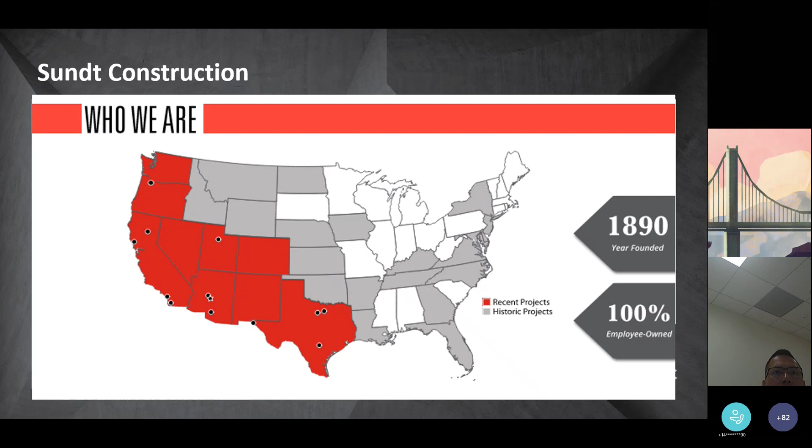All right, so our agenda for today, we've got quite a few topics to cover. Rather than reading off the list, essentially we're going to start with a project overview of the whole program, the various projects the program's doing, highlight some of the details, and then get into the project schedule, the bid schedule, and some of the particulars related to the bidding process, with the various instructions to bidders, pre-qual forms, and various exhibits and attachments. And then we'll open it up at the end for some questions.

All right, so safety is a very important component to Sundt. It's very important that all of our personnel go home at the end of the day the same way they showed up to the office or the job site. So with that, we like to start every meeting with a safety share. For today's pre-bid meeting, Jared's put together a quick safety share that he'll go through.

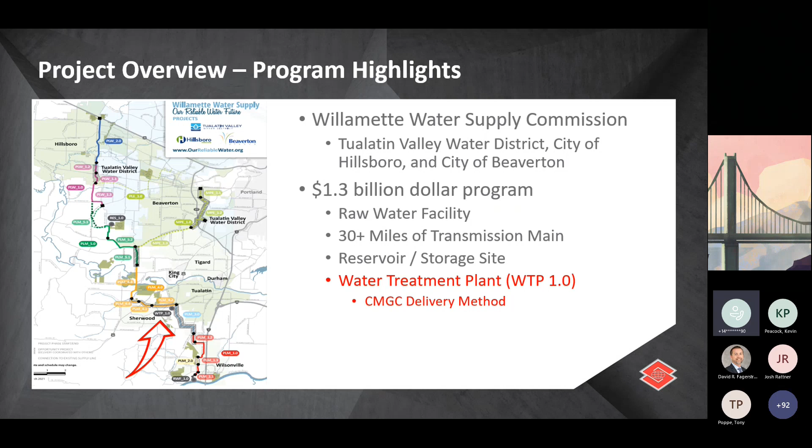The site was strategically chosen. The project is being designed to meet specific seismic requirements to provide a reliable water source to the customers of the treatment plant and this whole system.

A couple things to note specifically about the project site: it is a greenfield site, currently heavily forested with lots of large trees. The subsurface conditions, though, include a lot of rock, which means virtually all of the excavations, whether for structural excavations, pipelines, or duct banks, most of that excavation is going to need to be done through blasting.

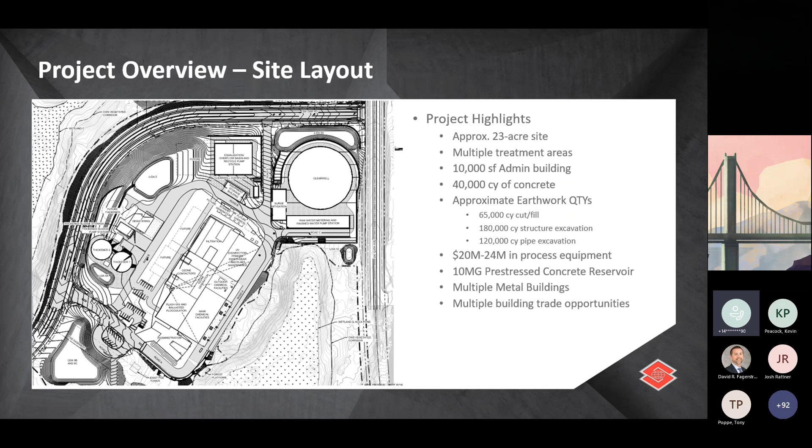All right, so as I mentioned, the last slide is going to walk through real quickly just a general overview of the various treatment processes or facilities on site.

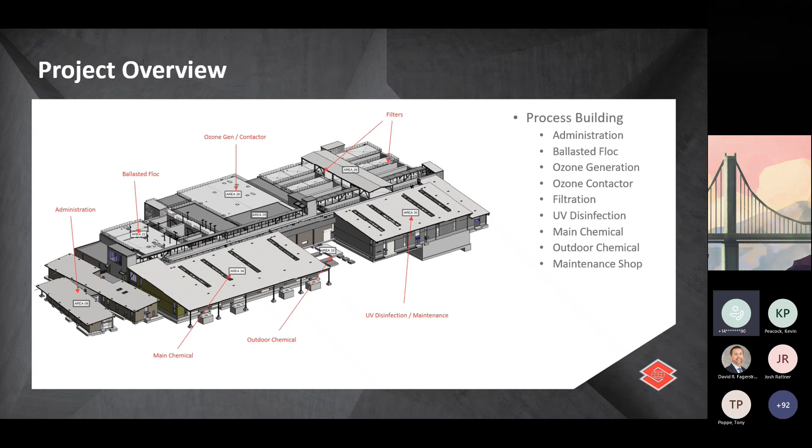Then the last area that we have is the solids handling facility. These structures are going to be west, or to the left, of where the process building was. And this is where all these solids are handled, dewatered, treated, and hauled off site.

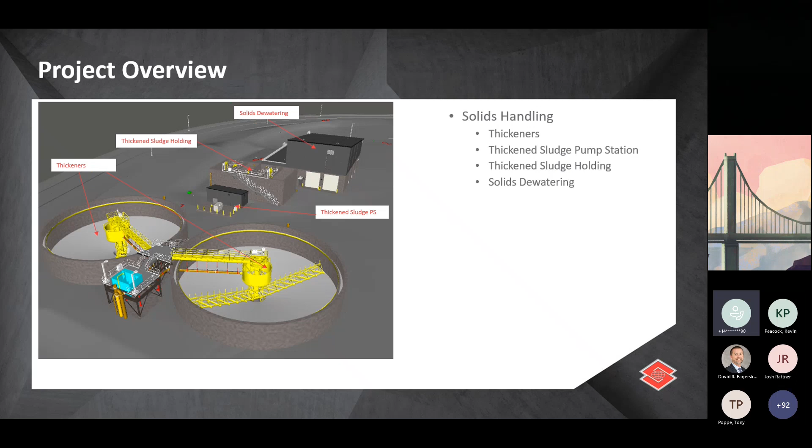You've got your thickeners, which are basically like some clarifiers. You've got the thickened sludge pump station, which delivers the sludge to the thickened sludge holding structure, and then finally to the solids dewatering building, where there's a couple of screw presses, some polymer equipment, where it's dewatered, conveyed into trucks, and then hauled off site. So that's kind of an overview of the entire treatment process.

Again, you've got lots of trade opportunities for the various building components, the industrial type stuff, your process mechanical, and all your electrical, associated HVAC, fire protection - those things associated with those structures.

Now we wanted to talk about a couple of the key components with the project that we're going to ask you to pay special attention to when you're going through the documents. The first item is the seismic design requirements. I briefly mentioned this on one of the first slides, that seismic resiliency is a key component to this project. The facility and the owner want this facility back in operation within a set period after a potential seismic event.

So we've built into the design and the specifications set requirements for confirming seismic qualification. This is going to apply to a good amount of the components on the project: your process equipment, your process piping, a lot of your electrical equipment, your HVAC equipment. It covers pretty much the whole gamut. I'm just going to ask that you spend some time reviewing the specifications and the requirements for it.

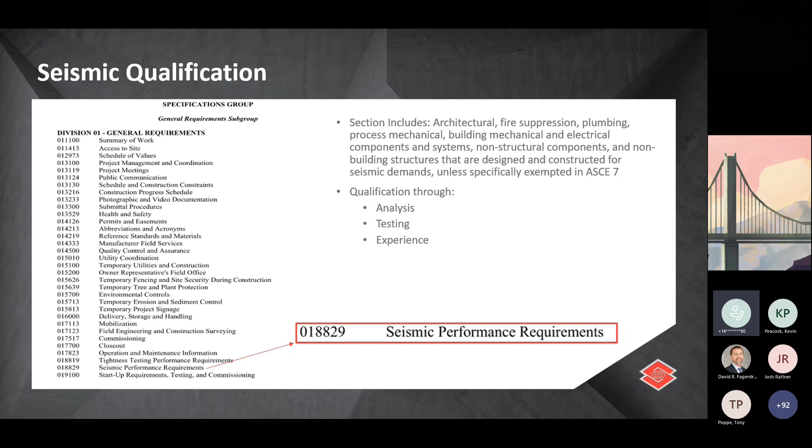The next topic we wanted to highlight that's a key component to this project is the delegated design requirements. Most of you should be familiar with this. Delegated design submittals are essentially submittals or final design documents that are prepared by the subcontractor. Your typical ones are things like fire alarm, fire sprinkler, pre-engineered metal buildings.

We just wanted to highlight that because it's a key component to this project. It's important to note that your delegated design needs to be stamped and sealed by a professional engineer licensed in the state of Oregon.

Again, there are several requirements for delegated design. We've called out specification 01-1100, Summary of Work, for a full list of delegated design items. Just ask that you pay special attention to that as well and go through those requirements. Again, we have called this out in your scope of work, so it's important that you review those requirements.

All right, next we'll go into the project schedule. This is a very high-level schedule—in the bid documents we've provided a fully detailed P6 schedule for you all, but we want to provide a very high-level 10,000-foot view of the project and basically how each trade, the windows of time that each trade is expected to be on site. That's what's being shown here on the screen.

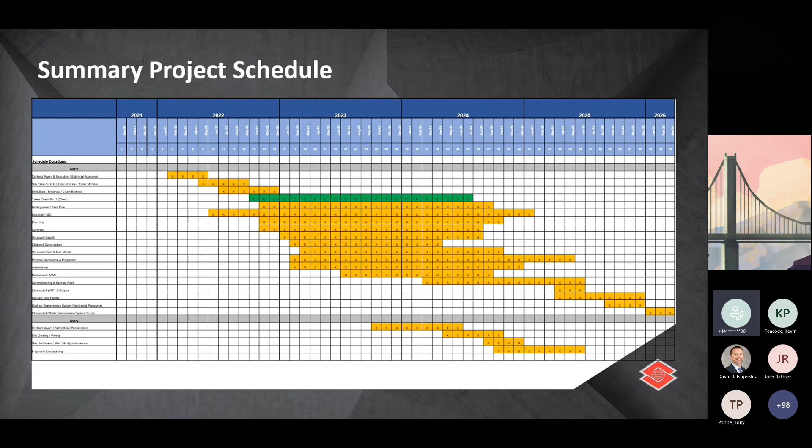Next we'll go over a couple of milestones. As I mentioned, we're expecting limited notice to proceed beginning of February 2022. We're expecting to receive full notice to proceed early April. There's a GMP2, which is a later scope of work for more of landscaping, curb and gutter, that type of finishes work. That work we're expecting to get NTP for in October of 2023.

We have a water treatment plant startup and commissioning milestone in June of 2025, and a construction substantial completion milestone at the end of 2025, December 31st, 2025. Then we have to have all of our closeout documents completed no later than March of 2026. One thing we want to point out: warranties will commence upon successful water treatment startup and commissioning completion, expected to be June 25th, 2025. So if you have warranties associated with your scope of work, which most do, we're expecting that the clock will start ticking on warranty starting June 25th, 2025.

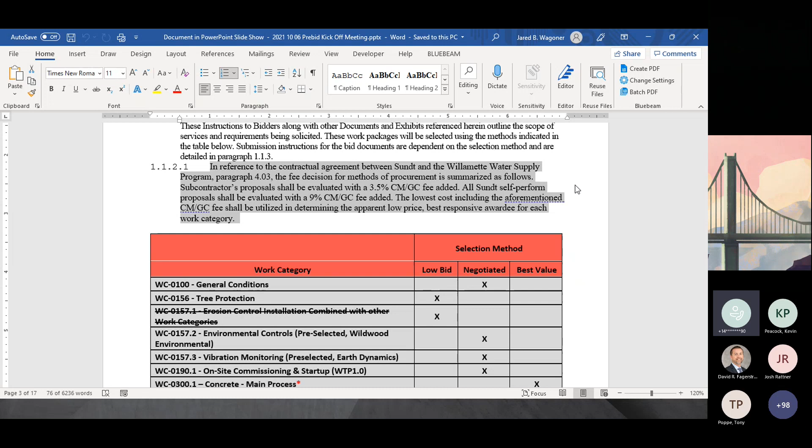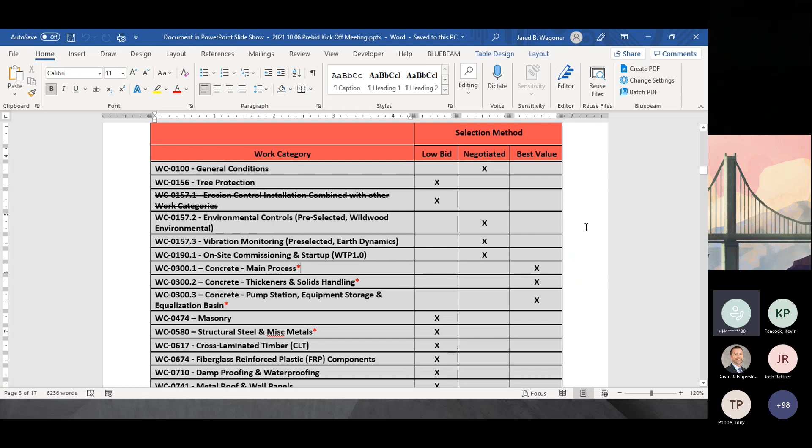Here's that table again of the work categories and the selection methods. The items that have a red asterisk next to them are the ones that Sundt is intending on submitting a proposal for. So we do intend to submit a proposal for structural concrete, structural steel and miscellaneous metals, earthwork and yard piping, and process piping and process integration.

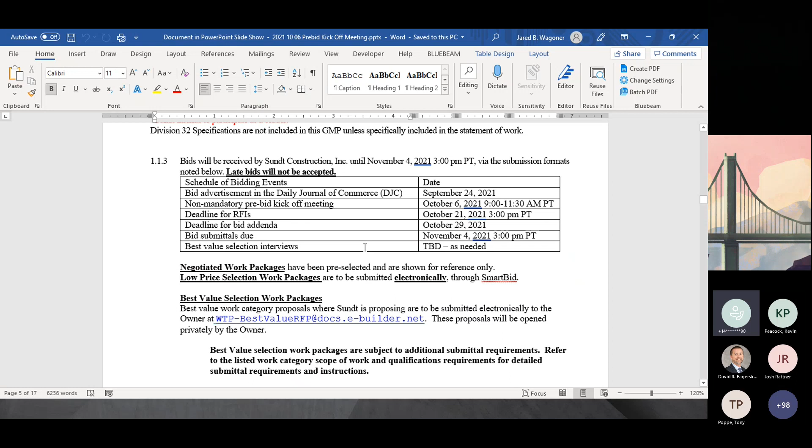Here's that schedule again for your reference on when the bidding period is. Bid submittals are due November 4th at 3 p.m. Pacific Standard Time. If you're submitting a low price selection work package, as identified in that table above, you can submit those electronically through SmartBid. Alternatively, you can also email those to orwater@sunt.com.

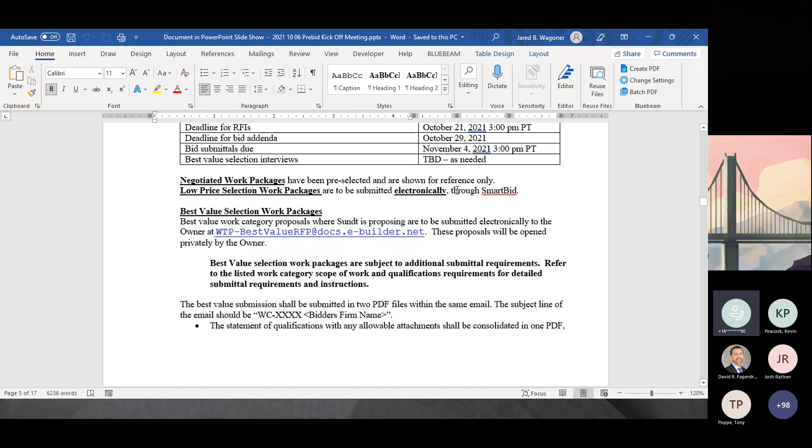If it's a best value selection work package, any of those work packages are going to be received by the Willamette Water Supply rather than Sundt, just to keep the lines straight so there's no conflict of interest on that one, and to maintain transparency.

So the email we'd like you to submit those best value work packages to is right there. It's going to be submitted in one email, and the instructions for how you need to label your documents are located here. It needs to come in two separate packages. We gave you, in each one of the best value work packages, a bid form for how you need to indicate your pricing, as well as a statement of qualifications.

The statement of qualifications has a couple of questions and requirements, and that needs to be a separate PDF labeled appropriately within the same email that goes to that Willamette Water Supply email. Before we move on from this, just to reiterate, the best value selection scopes of work are...

Structural concrete, electrical, earthwork and yard piping, and process integration. So if you plan on bidding any of those work packages, the statement of qualifications and your bid forms need to be submitted via email to the email indicated here in the Instructions to Bidders.

And the SOQ, the qualifications, need to be one PDF. Your bid form is a separate PDF. The reasoning for that is so that when the documents get turned in, the pricing will be given to one group and the qualifications will be given to another group, so that the grading is done independently of each other, and the cost is not influencing the qual grading.

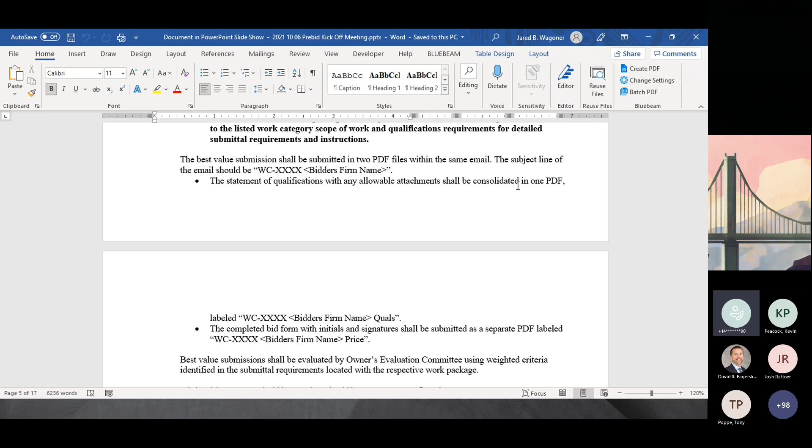Well, thanks, Mike. All right, scrolling past a couple of these items, they're valuable information on the project. We're going to cover some of the WIFIA requirements later on, and I'll define that here in a minute. I do want to point out that the project is using WIFIA money.

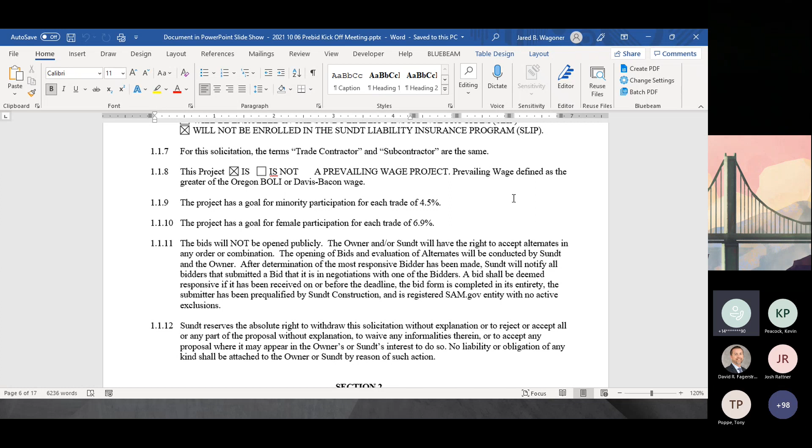However, we do not have DBE or MBE goals on the project. There is a goal for minority and female trade workforce participation of 4.5% and 6.9% respectively. So just to reiterate, we do not have a subcontractor required MBE, WBE, DBE participation, but we do have a trade percentage that we're being asked to meet.

The bids are not going to be open publicly. I'll cover that, the laws related to that, here in a second, on a couple of slides.

The bid's going to be deemed responsive if it's been received on or before the deadline, the bid form is completed in its entirety, and the submitter has been pre-qualified by Sundt Construction and is a registered SAM.gov entity with no active exclusions. The pre-qualification for Sundt Construction is an online portal, and we'll have some more information on that in a second.

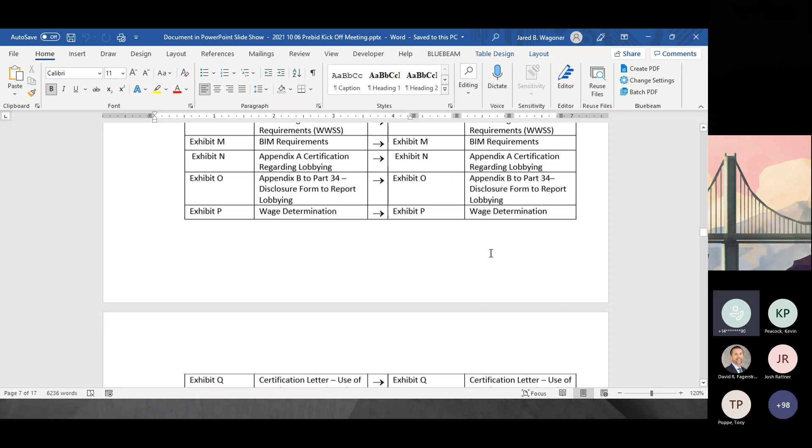The bid documents are all available for you in SmartBid. What we lay out here is how each one of the documents that you have during the bidding phase will be treated when we ultimately award these contracts. If it's going to be an attachment, it will not appear in the contract. If it's an exhibit, those will transfer directly and become a contract document. We'll cover each one of these exhibits in detail later on.

The intent is to bid all the work required on the project. The SOWs are going to lay out all of these requirements that we need to do. All the drawings, specifications, and any work which is in the bidding or contract documents which is inferable from or is a logical extension of those documents shall be considered as part of the work, and expected to be included as part of your contract or purchase order.

This is repeated on each one of our bid forms, the bidding period for the project. The bids are due November 4th.

We'll need the price on those bid forms to be good for 150 days. The reason behind the 150 days is Sundt has to have time in order to prepare our abstracts, make a selection, and present a guaranteed maximum price, or GMP, to the client. The client will need to take that to committee approval before we can turn around and give notice of selection or award. So that's the reason for the 150-day period.

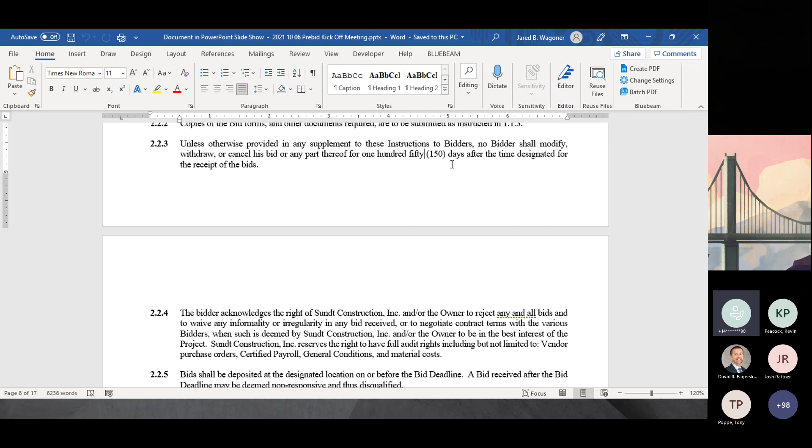We're asking everyone to make sure that we are competitive on all work packages, so we're looking for the best pricing on all these. The minimum qualification shouldn't overly restrict market competition. It's expected that some of the work packages are critical to meeting schedule or quality requirements and will have an enhanced pre-qualification or submittal requirements.

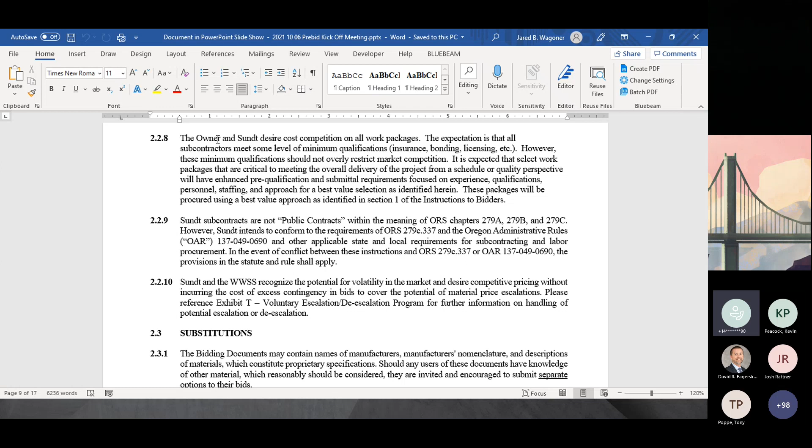Several of the bid forms have some enhanced pre-qualification requirements built into them, and several of the packages we've previously mentioned are going to be best value packages. So there's a couple layers of pre-qualification and submittal packages built into the documents.

Sundt subcontracts are not public contracts within the meaning of the Oregon Revised Statute. However, we are going to conform to the Oregon Revised Statute as indicated here.

There is an exhibit for voluntary escalation or de-escalation programs. With that 150-day bid period and the length of the project, there's been some concern on escalation and de-escalation. We'll cover Exhibit T in a little bit more detail when we go through it.

We do recognize the volatility of the market and uncertainty of what's going to be happening over the next couple of months and next couple of years. So we've worked diligently with the client to figure out the best way to minimize your risk of bidding the project and be able to get us the best, lowest pricing available today. We've come up with a unique strategy for managing escalation and/or de-escalation of given material types and commodities. We'll go through that in a little bit, but I just want to let you all know that there is an avenue to have escalation and de-escalation covered by the client and Sundt.

Under substitution: specifications in a lot of places indicate required manufacturers or products. If you have specific knowledge of a product or manufacturer that's not listed in the specification, you're encouraged to provide a substitution request for that. If you come across a case where you believe a product might be superior, either in performance or cost, send us an email and we'll do our best to run that past the client and engineer to see if that substitution is going to be acceptable to the project.

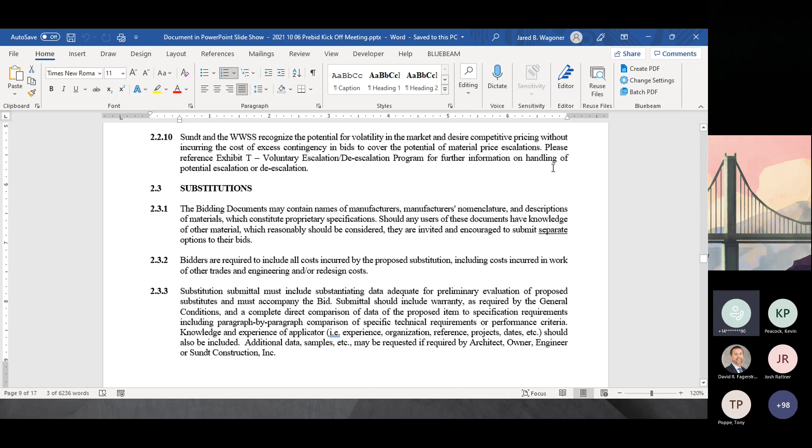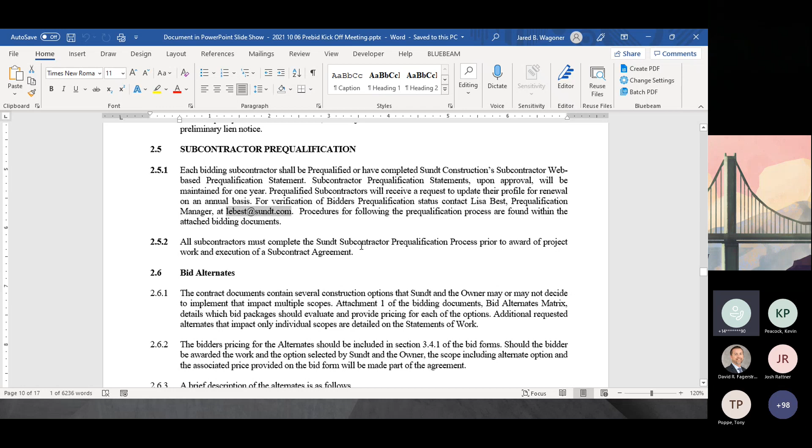Under subcontractor pre-qualification, we'll repeat this a few times. There's an email here, Lisa Best is our pre-qualification manager at Sundt. So if you need help with the pre-qualification process, she can get you started on that.

There's a couple of bid alternates that are baked into the documents as well, we'll cover that in a little bit more detail. There's a total of 7 alternates that need to be considered as part of a various number of packages.

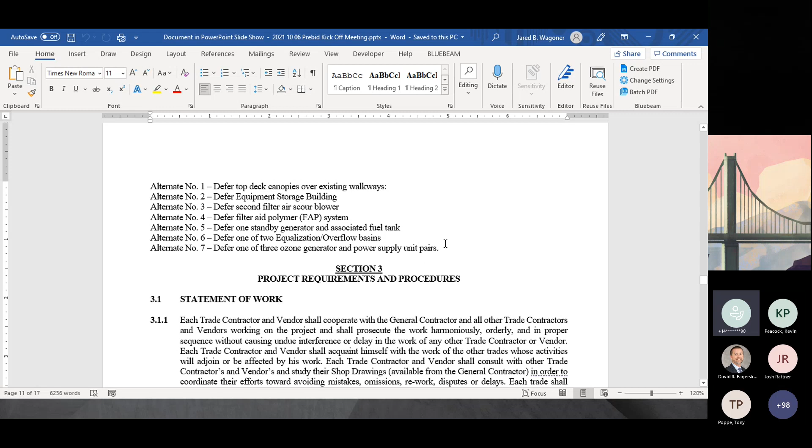These are the 7 alternates, and we'll provide some description and further information on which packages specifically need to include those. But we expect all bidders to take a look at all the alternates to ensure that they do not have scope covered, even if it's not indicated on that bid alternate matrix.

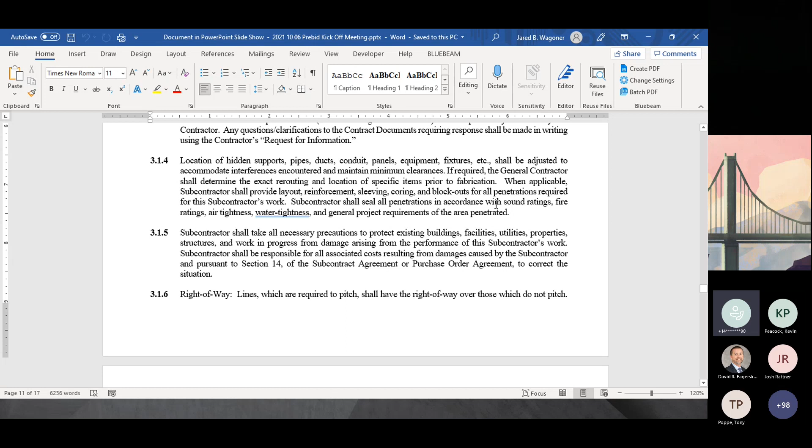Section 3 is our project requirements and procedures. This is a very general coverage of statement of work for how we expect the entire project and each of our trade contractors to coordinate with each other as well as the general contractor. A lot of the information in here is necessary for you to include as you're putting your package together. The specific job-specific statement of work and coordination requirements are included either in your SOW or in Exhibit B.1, special project requirements.

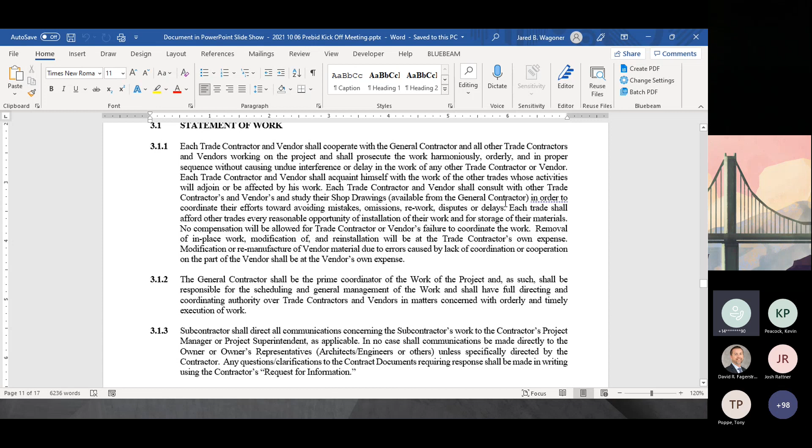Of course, any construction project will expect submittals, and we'd like you to submit your procurement schedule within 5 days after we award you a subcontract for getting all of your submittals in.

There's a number of holidays that we're going to recognize on the project, so those are listed here. We do know that the owner, in addendum number 1, will be adding an additional holiday, which is going to be Juneteenth. So we're expecting addendum number 1 to be issued this upcoming Friday, in 2 days, and one of those items will be inclusion of Juneteenth as a federal holiday or recognized holiday.

There's a number of project closeout requirements on the job specifically to provide O&M, startup, training, as-built documentation. So we lay out what those project closeout requirements are here, as well as in Exhibit B, and warranty requirements as well, spare parts, and how we're going to handle all of that information.

The project is funded through a federal program from the EPA called the Water Infrastructure Finance and Innovation Act. It's a federally funded project, so it comes with a couple requirements for the project to receive this funding. Those are laid out specifically in Exhibit L.

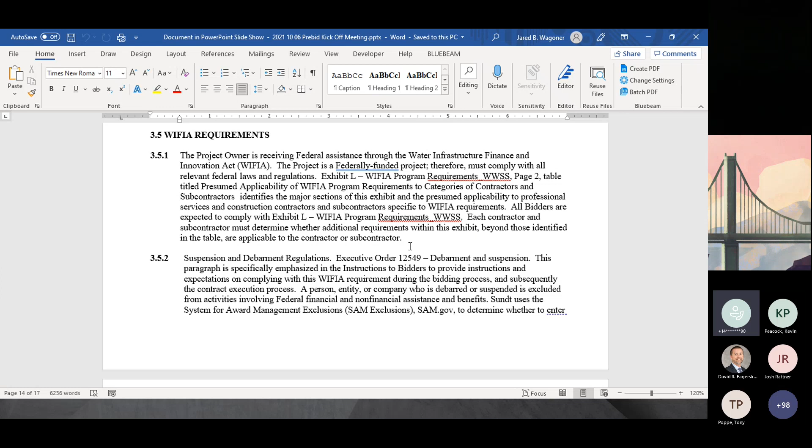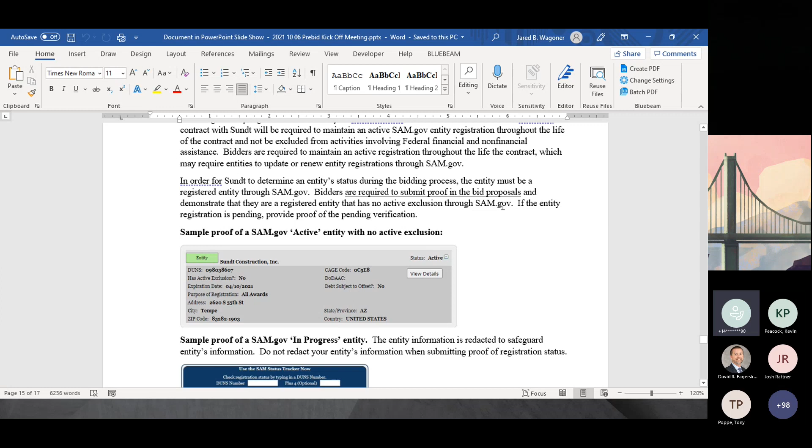Briefly, there's a few extra laws that we need to pay attention to. There's a requirement for you to be registered on SAM.gov. We need to verify that at the time of your bidding process, so make sure that you're good on SAM.gov with no active exclusions on there before you submit your bid.

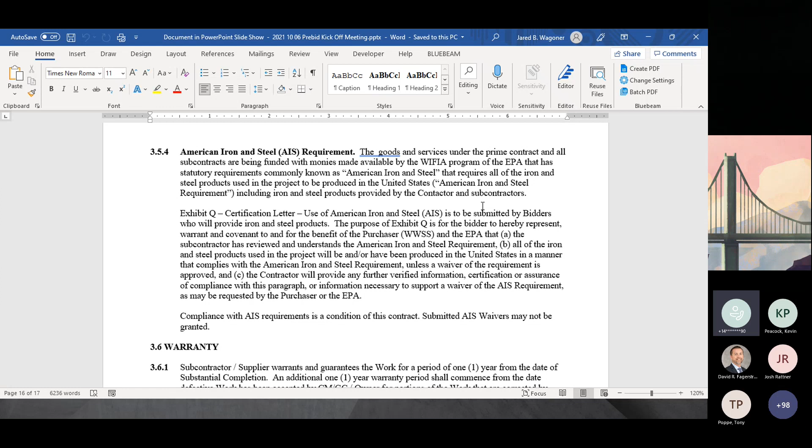The project's going to have a prevailing wage requirement. This prevailing wage needs to be the higher of either the BOLI or the Davis-Bacon wages. Those wage rate determinations are included in Exhibit P for your information. And finally, the WIFIA requirements have an American Iron and Steel requirement, which requires tracking of any iron or steel used permanently on the project to have traceability back to a U.S.-made source. That information is included in here as well.

One thing to note, Jared mentioned permanent materials. If there arises a situation where something was intended to be temporary but ultimately becomes permanent, that also needs to comply with AIS. The common thing covered here is any shoring — if shoring is left in place, such as soldier piles or soil nails.

I have a question regarding the AIS for process equipment. Is that applicable for all the process equipment?

There is a memo that provides exclusions for process equipment. If you're not familiar with that, if you wouldn't mind submitting a question, we can provide you access to some of that data. But there are exclusions to the AIS — some of your electrical equipment, your process equipment, those specially manufactured items are excluded from AIS requirements. Thank you, good question.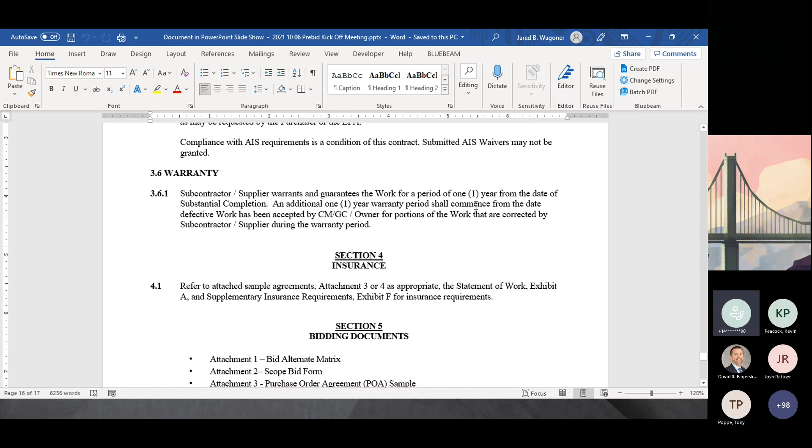Warranty for the project is going to be 1 year. As we mentioned before, that's from successful startup and completion date, so this will be revised. In addendum number 1 coming out this Friday, we will provide clarification that warranties start from the date of successful startup, the commissioning of the water treatment plant.

The insurance requirements on the job are going to be within the sample form of agreement. We've included attachment 3 and 4, which are your subcontract and purchase order agreements — those lay out the insurance requirements. We also have Exhibit F, the supplementary insurance requirements, which helps spell that out a bit more and clarifies those documents.

Section 5 of the instructions to bidders is just a list of exhibits included in the total set of bid documents. If you looked in the attachment section and see attachment 1, 3, and 4 — attachment 2 is the scope bid form, and that's going to be in the work category specific document, so you're not missing it, it's in there. And if you look through the exhibit documents and think exhibit A is missing, exhibit A is the scope of work directive, which is also within the work category specific documents and not included in the exhibit folder.

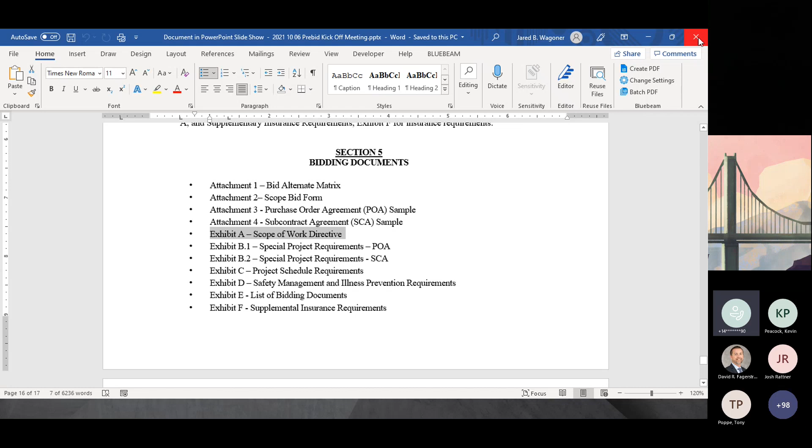Bid submissions by selection method. This applies to all bids. Everyone submitting a bid needs to complete the bid form, including initialing all of the acknowledgement boxes and signing the bottom of the bid form, and submitting that to us before the due date on November 4th. You need to be pre-qualified by Sundt Construction, registered with SAM.gov with no active exclusions.

There's also an Exhibit T, the voluntary escalation or de-escalation program. That's not necessarily required to submit with your bid, but if you want to participate in the program, that form needs to be included at the time of bid. We'll go over that program in a bit, but there's a line where you request to volunteer or indicate you do not wish to volunteer, so please sign it and send it back to us. If you fail to turn in the voluntary escalation or de-escalation program, by default you will be excluded from the program.

For low bid, as previously said, upload to Smart Bid. Alternatively, you can send it to orwater@sunt.com and we'll receive the low bid that way. If it's a best value package, there's an email address for sending it directly to Willamette Water Supply. Instructions are back in the instructions to bidders for how those PDFs need to be provided. The additional document included as part of the best value package is the statement of qualifications. Each work category specific document has a specific set of instructions for that statement of qualifications and what needs to be included in it.

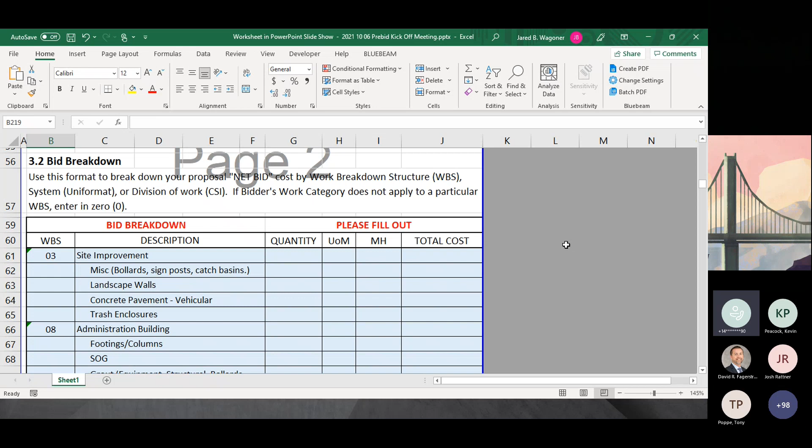Just to be clear, we're not issuing these as unit price contracts. These are going to be lump sum agreements. Good point. Yep.

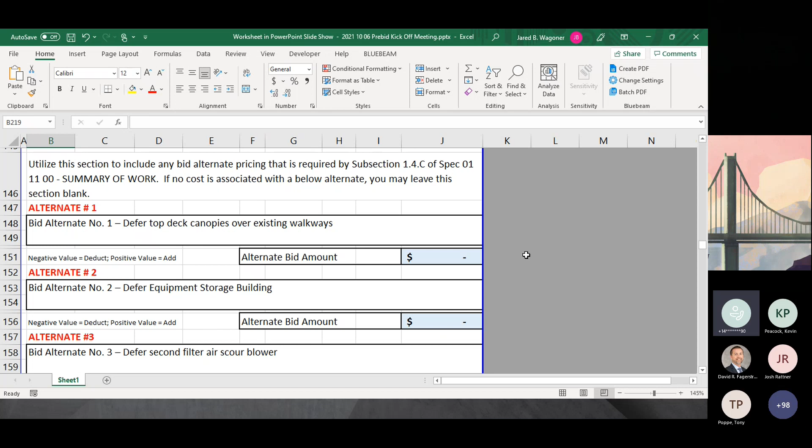Keep scrolling. So here, alternate pricing. As we mentioned earlier, there are 7 recognized bid alternates. We do provide space here for you to add in pricing—if it's a negative number that you add in, we consider that a deductive price, or if it's a positive number, it's the additive price. We do recognize that the bid documents, the drawings, show all of the alternates in detail, but we're going to provide a better summary coming out in addendum number 1 for each of these alternates, to help the bidders thoroughly understand the scope of work for each of these alternates.

And then in some bid forms, there are alternates—instead of 1, 2, and 3, there's alternates like A, B, C, and those are specific to the given bid form. I think there's only 4 bid forms that this applies to. So if you have one of those, please read those thoroughly and provide us a price accordingly.

We also have an area here for voluntary alternates. The owner and Sundt are very open to figuring out ways to lower the price of the project. So this is where we're allowing you all to think outside the box and let us know where there's potential cost savings through the design or through the specs that we could take into consideration. So we allow you here a couple areas to add in alternates. Feel free to put a detailed description of what voluntary alternate you're recommending and a price associated with that.

One thing to reiterate on all the alternates is that the alternates will all be additive alternates. So please do not include them in your line item number, your bottom line number from 3.0. All the alternates will be considered independent of your bottom line number, your abstracted number.

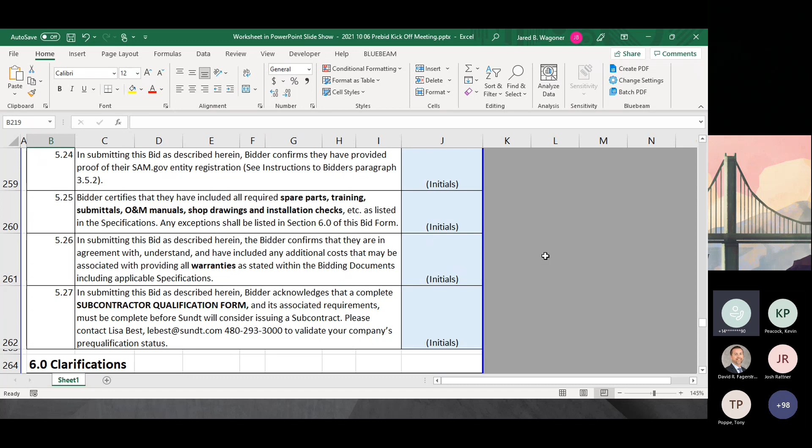Number 5, acknowledgements. This is fairly lengthy, but basically we want to make sure that you're reviewing all of the documents. It's more of a checklist to make sure you all have reviewed each of the exhibits, that you've confirmed you've read the subcontracts. We just ask that you initial by each one of these to say that you've reviewed it, as well as subcontractor qualification forms.

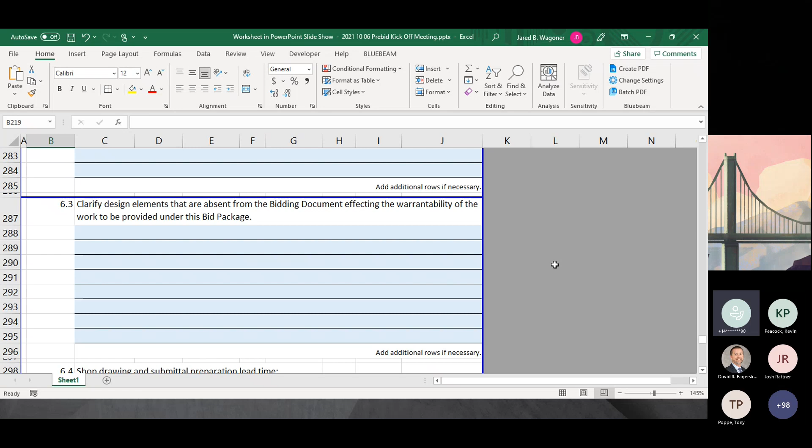And then 6.0 is kind of an open-ended area where we allow each of the bidders to provide qualifications to your bid or exemptions that you may have. So 6.1, 6.2, and 6.3, we ask that you feel free to add as much detail as you need. This is where you're able to add lines into the bid form as appropriate, based on your scope of work and your clarifications.

6.4 and 6.5, we ask that you provide lead times for shop drawings and submittals, as well as your fabrication and delivery time. This helps us iron out our P6 schedule, and we want to make sure we're aligning our schedule with the durations you all feel is appropriate, because durations have drastically increased for certain scopes of work over the past year and a half during COVID, and some are continuing to increase. We just ask that you convey that information to us so we can align it with the schedule.

And then 6.6 is qualifications or exemptions that you all have to the standard form of agreement, Sundt's standard purchase order or subcontract. This is where you would add any exemptions or qualifications that you have. And then last but not least, Section 7 is really just having a designated individual from your firm sign off and date the bid.

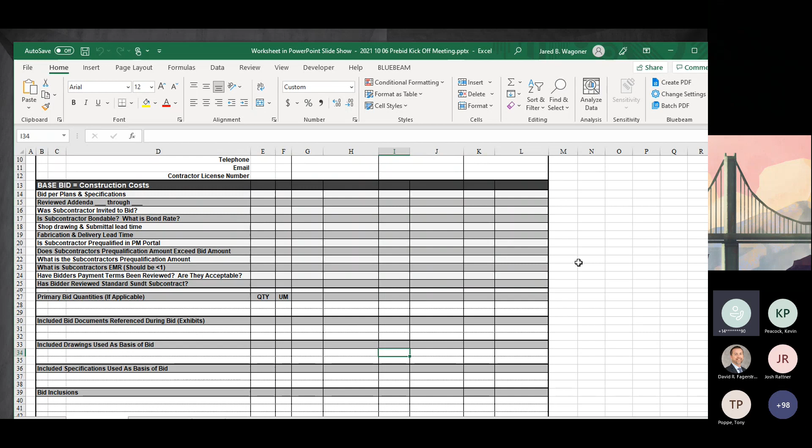We also want to make sure that on this bid scope or abstract, all of the other exhibits you've acknowledged are checked off. If you do not initial or check off that you've acknowledged the exhibits, similar to addenda, that is a breaking point for us on accepting bids. So please make sure you go through and review all of the exhibits and sign off on those, so we can make sure they get acknowledged on the abstract.

Moving on to exhibits and attachments. These are the exhibits and attachments that are all included in SmartBid. I'm going to go through a number of these, and similar to the instructions to bidders, try and highlight a couple of the key points in there.

To repeat myself again, all exhibits will be included in the contract. The attachments are only going to be during the bidding phase, so you can look at that separation of the nomenclature a little bit differently like that.

So the first one I'm going to open up is the bid alternates matrix. All right, so here we lay out all of the work categories as well as the 7 alternates that were identified in the summary of work, specification 011100, and in the relevant places in the drawings. What we're trying to do here is identify each work package's assignment to each one of the alternates and lay that out.

All alternates are meant to be additive. So again, your base bid price should not include the changes described by the alternate. The alternate is extra. If the owner chooses to employ or select an alternate, then that alternate price, whether positive or minus, will be added to that base bid price when we issue the subcontract agreement.

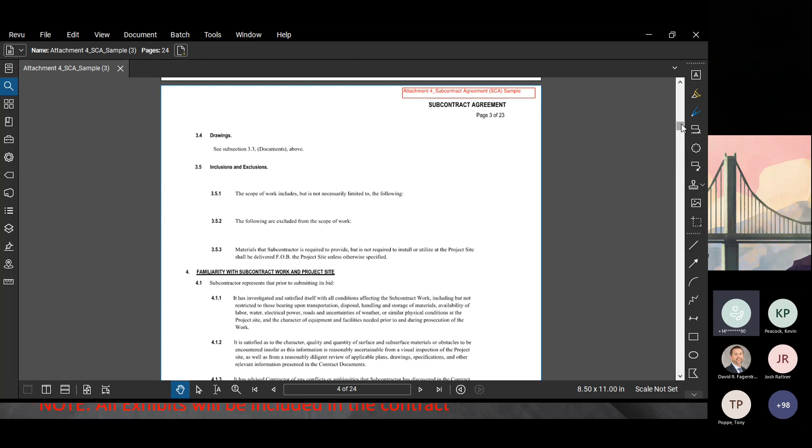If there's any clarifications required on the subcontract agreement to the terms and conditions, those are going to appear at the very last paragraph right above the signature line. So as you're going through this, each page will need to be initialed, and the final section down here is for the signature page.

And to reiterate it just one more time, when we issue this for final signature, we don't allow markups on the final issue of the subcontract agreement. Anything that we need to negotiate needs to be incorporated into the clarifications, inclusions, or exclusions. So we'll prepare a clean copy for execution when we send it out.

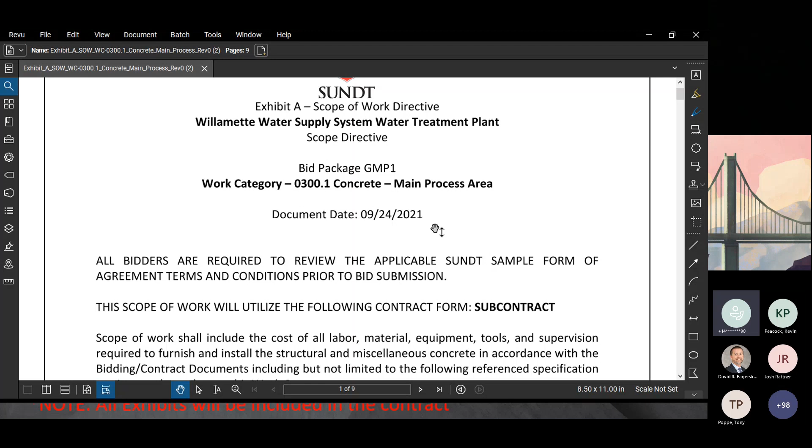Next up was a scope of work directive to give you a sample of what one of those looks like. So picking on concrete a little bit more, this is 0300.1 concrete, the same work category that we displayed the bid form for.

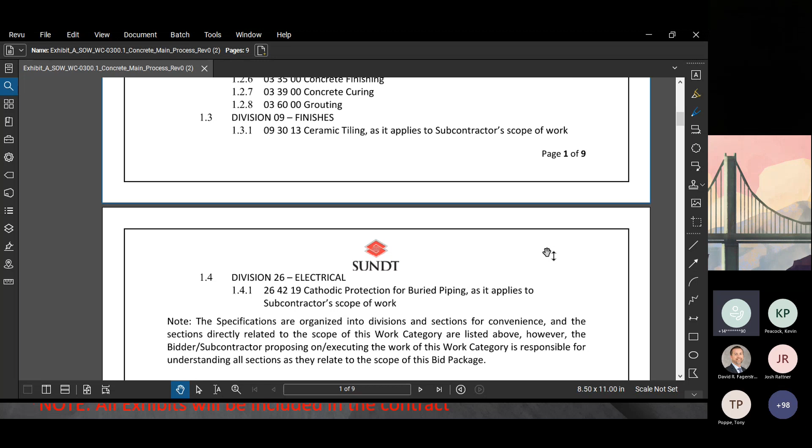Section 1 is the specification section. So as we went through each one of these work categories, we identified the specification sections as they directly relate to the work category. Each subcontractor or bidder proposing on it is responsible for understanding those sections as well as all of the contract documents.

Documents and reports, this used to be a lengthy section. If anybody's bid on any of Sundt's projects in the past, we've condensed that all and included it in Exhibit E instead. Section 3 is the trade-specific scope inclusions.

Yep, so go ahead, Mike. So the trade-specific scope inclusions are meant to be further clarifications to the scope. As Jared showed earlier, we've gone through painstaking detail to illustrate what specifications apply to this given scope of work.

So based on what the scope of work entails and those specifications, we expect that you have all of the entirety of the specifications in addition to these trade-specific inclusions. These trade-specific inclusions are meant to provide greater detail or additional items that are not currently called out in the specifications.

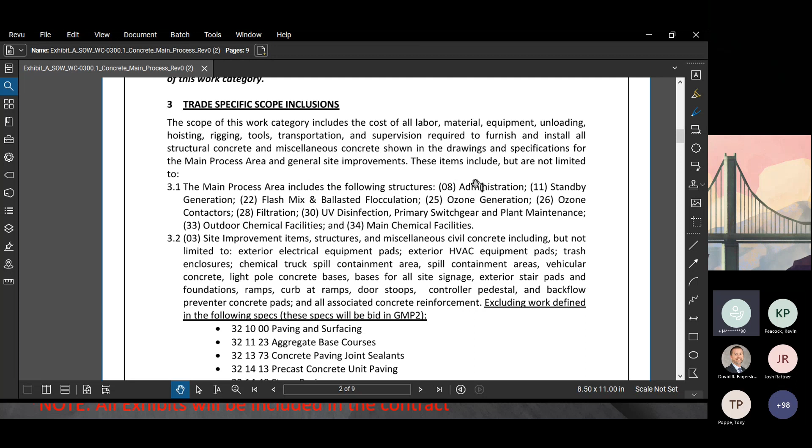Thanks, Mike. So this is the bulk of the SOW with the inclusions that are going to be in here. Took some time to go through this to build out all of the list of these inclusions.

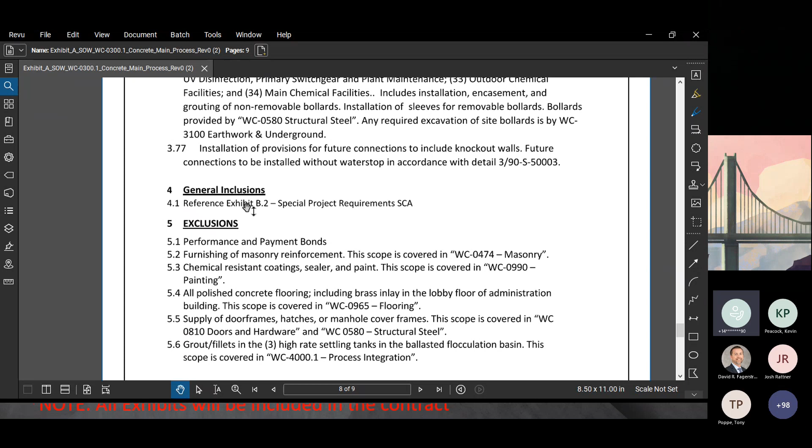The next section in here is general inclusions. So this, again, used to be a lengthy section within our agreements. We've taken that all and put it into Exhibit B.2 or B.1 special project requirements. Those general inclusions are things that apply to either all subcontracts or all purchase orders, respectively.

Yep, and then in exclusions, we again took a lot of time to make sure that if something didn't apply to a given scope of work, we made sure that we wrote it in as an exclusion. And for a good example here, I'll take a look at 5.2, furnishing of masonry reinforcement.

So in this given scope of work, we have it that the concrete company owns installation of masonry reinforcement, but the mason ultimately owns furnishing it. So we wanted to show here that in the exclusions of concrete, this item is specifically excluded, but in the masonry scope of work, it is specifically included. So we've done this to make sure that the gaps are covered in between the individual scopes of work.

Under each one of the exclusions, I want to point out 5.1, performance and payment bonds. So Sundt will be using our internal subcontractor default insurance in lieu of performance and payment bonds on the project. So we've excluded the cost of performance and payment bonds for all subcontractors.

We talked a little bit about the pre-qualification process. In the event that your firm is selected as the low bidder and you're on the borderline of being eligible for our subcontractor default insurance program after the pre-qualification process, this final exclusion may be shifted to requiring your company provide a bond in lieu of subcontract default insurance. But as a baseline, we're going to exclude performance and payment bonds.

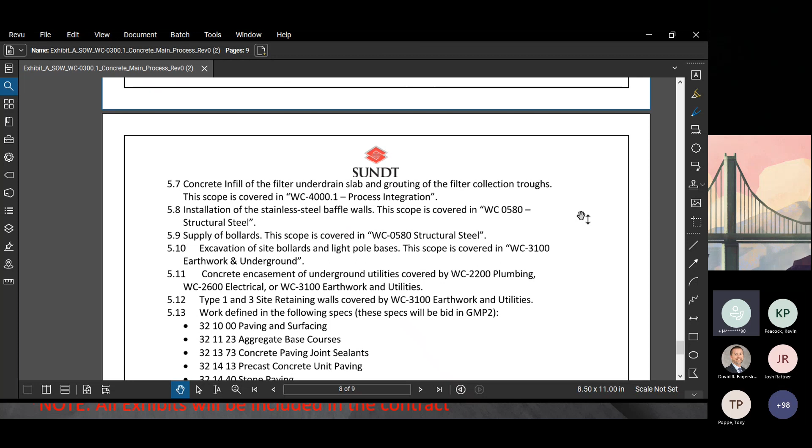Last section in here is going to be alternates. So that attachment 1 laid out the bid alternate matrix. We also laid it out in here for clarification.

Next one is Exhibit B.1 and B.2. As I mentioned previously, B.1 and B.2 differ based on which one is a subcontract agreement and which is a purchase order. B.1 is for purchase orders, and B.2 is for subcontract agreements. These are basically the general instructions for all subcontractors or purchase orders on the jobs as they apply to everybody. So rolling quickly through this.

The general section up at the top covers job site communications, flow-through language from the prime contracts, how we're going to handle payments, retention, and basic job site expectations, rules, and behaviors on the job site - no offensive logos, clothing, things like that. It also lays out a section on the liquidated damages as they would apply as a flow-through item on the job.

Specifically for B.2, it does discuss crane usage. It is the intent that Sundt will be providing cranes on the job, and there's a section in here that's very specific about exactly what cranes we're providing. At the main process building, we intend to provide a tower crane, a single tower crane, and then we'll be providing 3 additional mobile RT cranes to support the other structures.

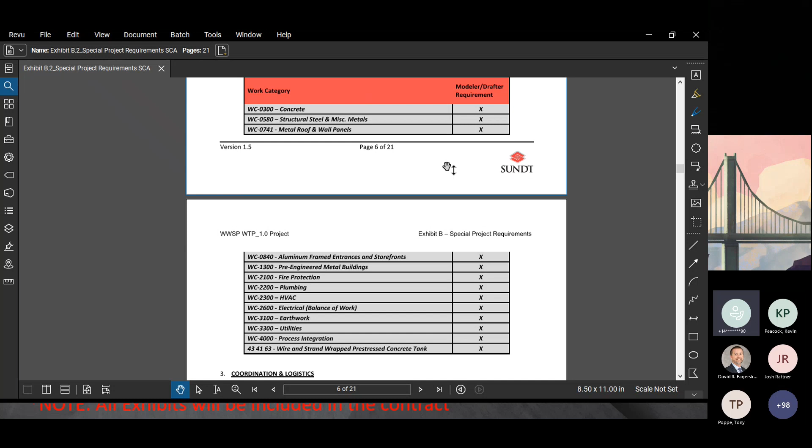There's some BIM requirements on the job - building information modeling. Specific work categories are required to provide a model or a drafter. Those requirements are laid out in Exhibit B, and it tells you which work categories need to participate. It's also laid out in your scope of work directive that you need to provide a BIM modeler for each of these work packages. So there's repetition within here.

Section 3 is the section that Mike and Dave were talking about in terms of coordination and logistics. In addition to the cranes and how we're handling that as a CMGC, it covers all of the temporary utilities, porta-johns, tent facilities we're going to have on the job site, dumpsters, access, staging, storage, and working hours for the project.

One other thing I wanted to point out is cleanup. We're intending on using a composite cleanup crew to help clean up messes or work that isn't directly attributable to any specific work category. We'll need to keep this job site clean. Sundt has a policy of relentless housekeeping to make sure our job sites are some of the cleanest anybody's ever stepped on. This is key to maintaining a job site that's in good, clean order and keeping everybody safe.

The other section in here is on supervision. We have expectations of the supervisor on a job site - certain things they're expected to perform. This lays out our expectations for what a supervisor needs to be doing and what they're going to be responsible for.

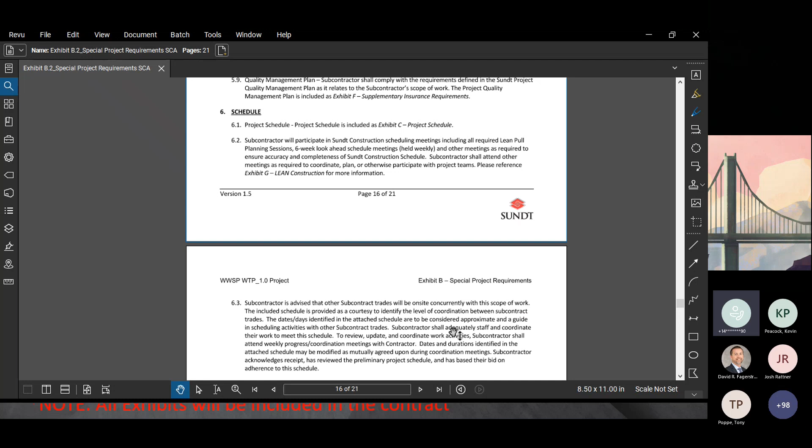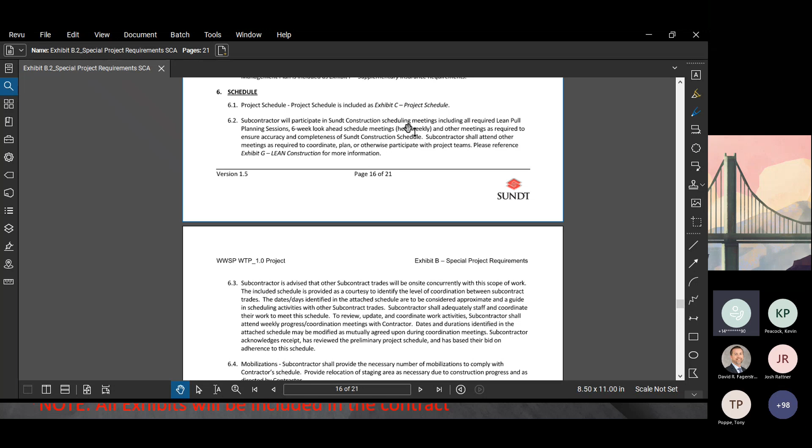Quality has its own exhibit, but we lay it out briefly here with the expectations of our quality program. A number of work packages will require mock-ups, included in each individual statement of work as well as the general statement here in Exhibit B. We also have a section on the schedule and how we intend to execute it. As part of the due-out from subcontractors, as you review that schedule, take a look and provide any feedback. This also lays out how we intend on making modifications or coordination to the schedule as work progresses.

Here's those holidays again with the addendum. We'll add Juneteenth on there.

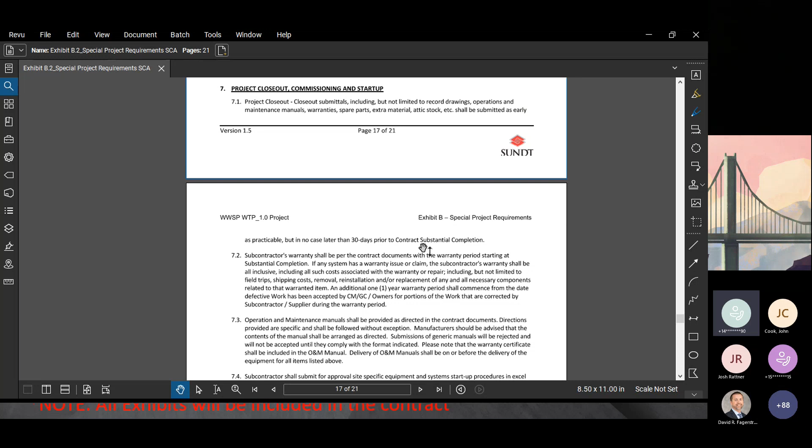We have a section on project closeout, commissioning, and startup. So if your scope of work requires you to provide closeout materials, record drawings, O&M manuals, warranties, spare parts, extra materials, that's all laid out right in here. Again, this is supplementary to the contract documents.

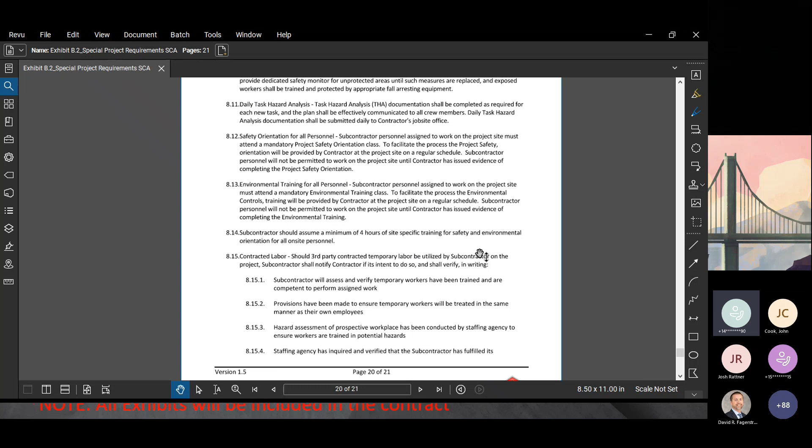There's a couple items that are owner-furnished items, and that's the final section of Exhibit B.2. So if you see these in the documents, they're there for reference or information only - these are going to be provided by the owner.

All right, project schedule. We looked at that. I'm not going to go through that one in specific detail, but know that that's included in Exhibit C for you to take a look at, provide comment and feedback on.

Exhibit D is our safety management and illness prevention requirements. We provided this exhibit with our draft safety management and illness prevention plan. We'll finalize it as we close in.

There's a number of sections in the safety management and illness prevention plan that require specific inclusion of subcontractors - who they are and who their people are. So as we finish laying out the job, we'll finalize this plan and get it incorporated, but the major components of what needs to be incorporated from a pricing standpoint and for you to comply with our safety program are included here.

So our take on our safety program is that our plan is the bare minimum of what you shall do. Now, if your firm has internal safety policies that go above and beyond, we are more than willing to adopt those or to support you on that. But we require that our safety plan is the bare minimum of what your firm shall be restricted to.

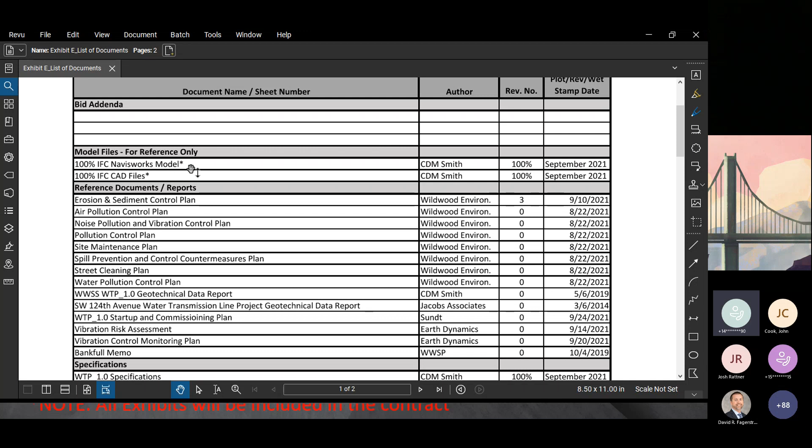Exhibit E is your list of documents, the library for the project. As we issue bid addenda, those will be added to your Exhibit E. We have some model files that can be provided for reference, Navisworks, CAD, as well as Revit, along with some reference documents and reports.

We mentioned the environmental plans, which are included here, prepared by Wildwood Environmental, along with the geotechnical reports for both the site and 124th Avenue. We've also prepared a startup and commissioning plan relevant for a couple of those work categories, and a Bankfull Memo, also related to the startup and commissioning process for how we're going to be handling water on the job site for testing.

You have a package of specifications, including a set of specifications for security. Those are secured in SmartBid so that not everybody has access to those security documents. If you feel you require access, please contact us—we do have to review that with the client to make sure there's good cause for sharing that.

Right now, the electrical work category package is the only one that has view-only access. Again, if you require access, please reach out to us and we'll see how we can get that to you. There are a couple of work packages—specifically the ballasted flocculation equipment, UV reactor, and screw press—that were critical to developing the design.

Those were designated as early works packages, so Westech, Calgon Carbon, and FKC respectively started developing submittals for those to be incorporated into the final design. Those submittals are included for your reference as well, if you need to review them as part of developing your pricing. We also have a list of all the attachments and exhibits that will be included.

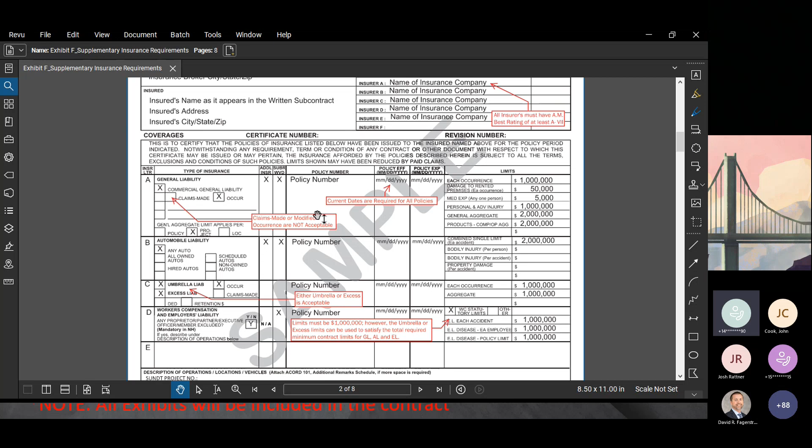Specifically, we have a number of endorsements that need to be included with each insurance package. The one I want to bring to your attention is the matrix included at the back of Exhibit F. The subcontractor purchase order agreement has a section on insurance, and sometimes it's unclear, depending on the scope of work you're performing, whether or not you need to provide a specific insurance policy. This matrix clarifies the subcontracts and purchase order agreements, specifically indicating which work category package needs to provide which insurance.

Additionally, our prime contract has some flow-down language for minimum insurance requirements, so those are clarified in here too, regarding which work packages need to include insurance at a specific level. Specifically, the prime contract has a $25 million umbrella policy, and we recognize that not everybody needs to carry $25 million in umbrella insurance. So that's clarified here, about exactly how much insurance each work package is expected to have. Similarly, with pollution liability insurance, only select work categories require it.

Professional liability insurance, as you can see in the far two right-hand columns, is required for most all work categories. The reasoning goes back to earlier in our presentation where we talked about seismic design and delegated design requirements—there are a numerous amount of submittals and designs that have to be done for each work category package throughout the project. So we're asking that everyone provide professional liability insurance as it applies, if you have to provide either delegated design or seismic design.

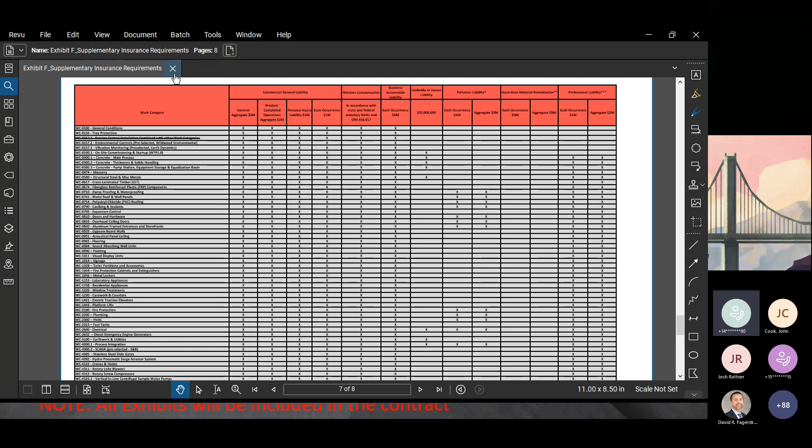Lean construction is something that Sundt has used for the last couple of years, now in how we manage both our long-range and short-term schedules. So this Exhibit G, Lean construction, talks about how we manage those schedules. It's specifically the last planner system of Lean construction.

We'll do a weekly work plan, so all trades will turn in a weekly work plan for the work they intend on doing for the next week. Then we will evaluate the previous week's work plan to see if we were able to accomplish everything that we had planned on doing.

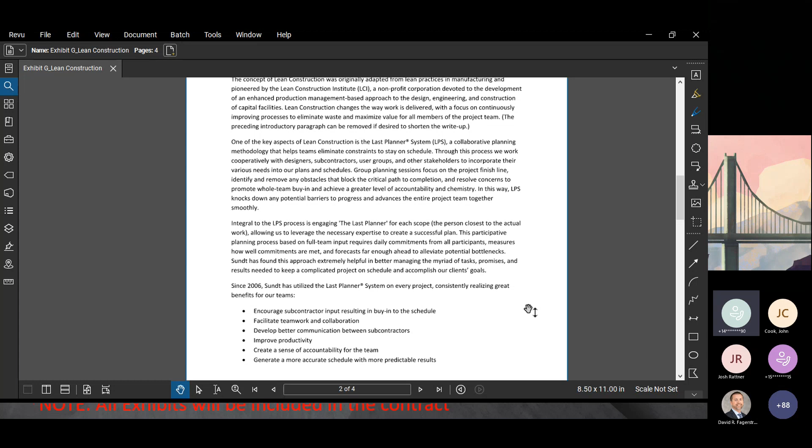If you are unfamiliar with the Lean construction process, that's not a problem. We will go through a training process with you and your frontline supervisors to make sure it's clear what it is. Really the main purpose of this is trying to keep all trades as efficient as possible and eliminating the small, minute issues that end up holding up either your own work or other trades' work. So we try to manage that on a weekly basis through multiple methods prescribed in the Lean process.

So take a look at that exhibit. It lays out some of the details on a couple of those things. We'll ultimately provide training on the job site to help whatever on-site supervision you have participate in this program and keep everybody efficient and minimize as much waste and inefficiency as possible.

Textura. So for our agreements, we use Textura as our payment management system. Textura does a couple of things for us: it tracks our schedule of values and payments, and you'll submit your payment application using Textura. Textura also helps manage compliance, specifically as it relates to lien waivers and insurance certificates. It tracks the expiration date for each of the insurance certificates and makes sure that information is kept up to date and the project stays within compliance with those requirements.

It's a totally electronic system, so you'll sign pay applications and submit electronically. You'll receive your payments via automatic clearinghouse transfers. The one thing to keep in mind as you look at this, there is a small fee associated with using Textura for the subcontractors.

It's laid out right here: the fee is going to be 0.22% of your contract value, up to a maximum of $3,750.

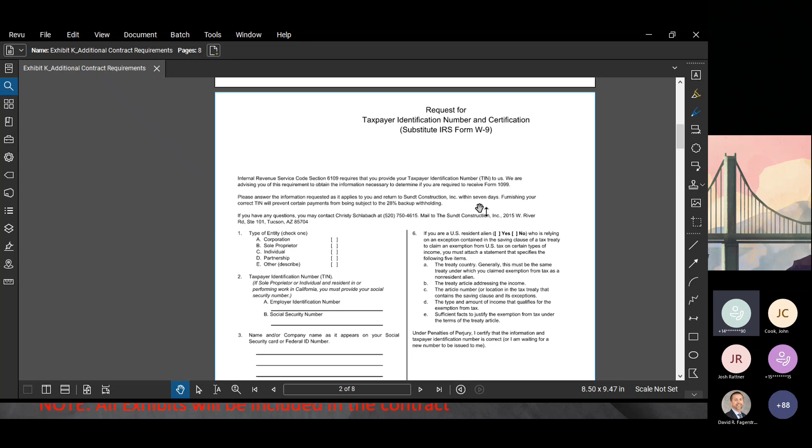Exhibit K is additional contract requirements. Whenever we issue these subcontracts and purchase orders for execution, there's a number of documents and forms that need to be executed: a W-9, Code of Safe Practices, which lays out Sundt's basic rules for safety on the job site, and a minority status form. Just a couple documents that we'll have filled out whenever we actually execute these contracts.

Exhibit L is the WIFIA program requirements. Exhibit L, N, O, P, and Q are all components of the WIFIA program. Within Exhibit L, this is the total layout of the program for the Water Infrastructure Finance and Innovation Act. The project is receiving funding through this program, so there's a couple things that we need to comply with as a component of receiving that funding. There's a couple federal laws that specifically apply to the project.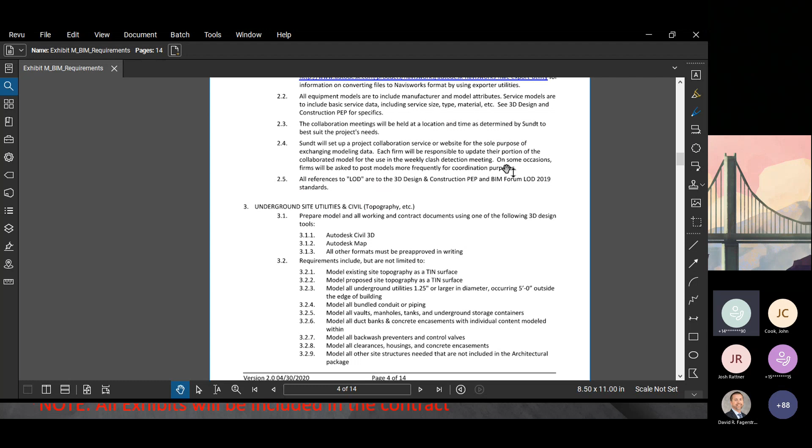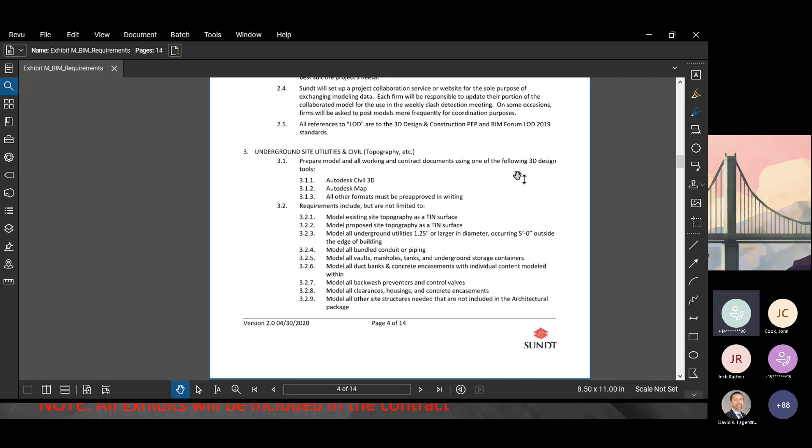Clash detection and incorporate the elements of the model. One of the things that's important in this document is we also lay out which trade takes priority over others, which in an architectural type commercial building, typically architectural takes higher precedence. In this wastewater facility, obviously the process takes priority, and so we have it listed out in this document of what that flow down is of which trade takes priority over another.

The only place where architectural does take higher precedence is in the administration building, where obviously that is more of a commercial structure than it is a process plant structure. So just pay attention to that, because that's what we will be abiding to when we go through and do our clash detection.

Appendix A, certification regarding lobbying. This is one of the requirements of the WIFIA program. So as we execute these contract agreements, there's a certification regarding lobbying that will need to be executed by your company and provided to Sundt before we can proceed.

Same with Appendix B to Part 34, disclosure form to report lobbying. The second half of that same form is for a specific disclosure on lobbying activities.

Exhibit P is the wage determination. This wage determination was provided effective September 16 of this year, and this will be applicable for the life cycle of the project. Each subcontractor is required to pay the greater, not the minimum, the greater of either BOLI or the Davis-Bacon wage. Correct. So pay special attention to this.

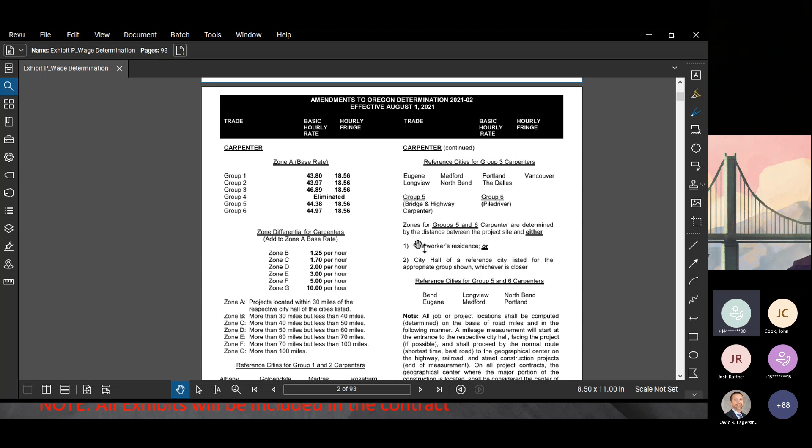Exhibit Q is the certification letter for use of American iron and steel. So with each one of those iron and steel products that's provided on the project, it requires some tracking paperwork to go with it to verify that it was in fact provided and is in compliance with the American Iron and Steel Act and the WIFIA program.

All right, Exhibit R is our construction management plan, and I'll let Mike cover this one. Yeah, so this is our site logistics plans. We want to share this with everyone. We've provided a couple drawings here. It's kind of our phasing that we expect the plant to go in.

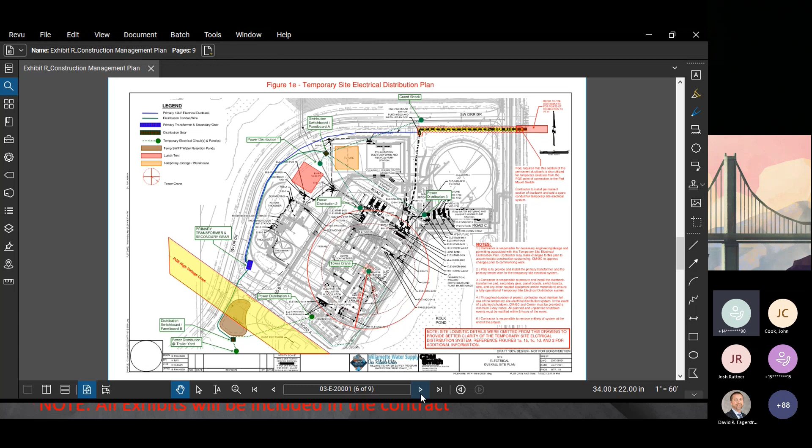This next drawing is our temporary site electrical and distribution plan. Similar to the temporary water plan, this is the responsibility of work category 2600, the electrical scope. We've been working with PGE throughout design to provide a point of connection for both temporary and permanent electrical connections, and we've put together a rough logistics drawing showing where power needs to be distributed throughout the site, as well as a one-line diagram showing power requirements, where, and for what. So if you're bidding the electrical 2600 scope, pay great attention to these drawings.

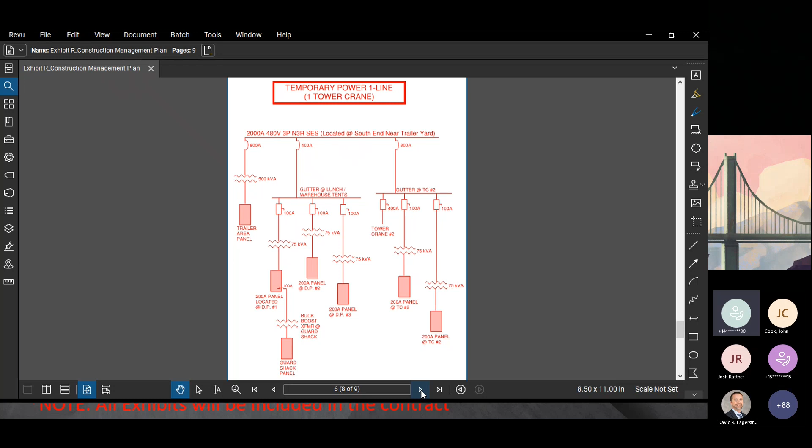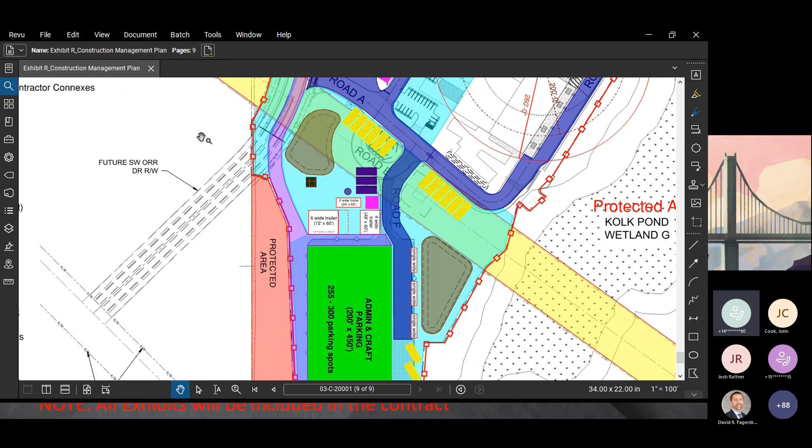Starting at the bottom portion south of the PGE lines, the admin and craft parking lot is fully established. We have multiple trailers established there, single-wide trailers as well as the owner's and CMGC's trailers. We've also established areas for connexes to be set up, and we indicate the tower crane location along with the mobile cranes we anticipate providing, which is all detailed in Exhibit B.2 for subcontractors.

We will also be providing — you can see there the large squares, a 100 by 100 red square and a 100 by 100 orangish-yellow colored square — large Quonset hut type tents: one for an on-site warehouse for storing materials and equipment, and another for a lunch tent and all-hands meeting room.

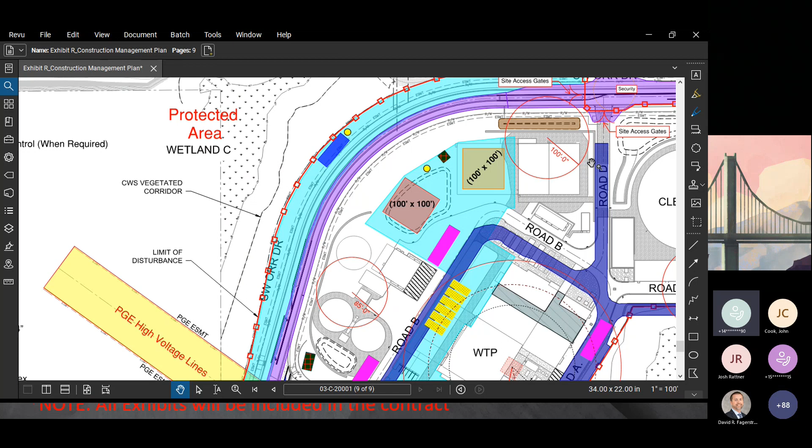One important note, also illustrated in B.2, is that we're implementing a right-hand turn only as you're exiting the facility, mainly for safety purposes. With the amount of traffic anticipated coming on and off site, we want to make sure that as we're leaving the site we're not crossing oncoming traffic, which could pose a hazard not only for our employees but also for the public. We'll establish signage along with that, and some policing if required.

One thing to add, as Mike touched on, is that a lot of these temporary facilities are called out in the various work categories, like electrical and yard pipe. So when you see in the earthwork work category a paragraph or inclusion requiring you to put down temporary roads or anything like that, you can refer back to these drawings to show the layout of where those will go.

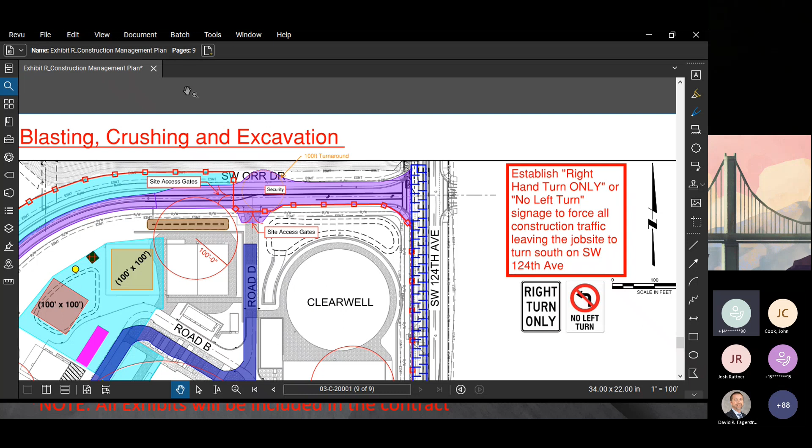Exhibit S is our scope delineation document. With the requirement to trade off a couple different scopes between specific areas, we thought we'd lay this document out to help provide that clearly.

The first set of documents is for concrete scope. There are 3 concrete packages as well as the pre-stressed tank. This color-coded diagram explains which concrete structures belong in each one of the work category packages, and it is bookmarked for your convenience.

The second set of documents is the in, under, around documents. With the underground piping, as well as some of the above ground process piping, we needed to delineate the point where yard piping is completed and either plumbing or process mechanical picks up the scope from there. Within the SOW, it says that yard piping owns this piping to within 15 feet of the building or to the first flange as it stubs up inside the building. So to help clarify that a little bit, we laid out here where the expectation is that each one of the trades will pick up and drop off for each one of the lines.

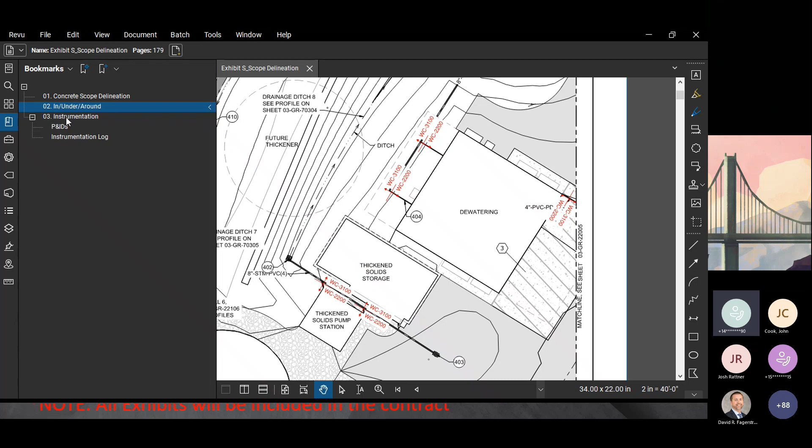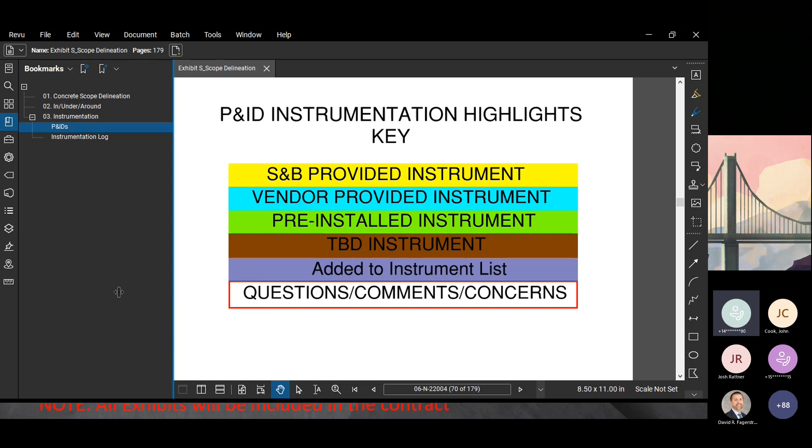The final section is instrumentation. We've provided both a log as well as marked up process and instrumentation diagrams that lay out the responsibility of who owns which set of instrumentation on the P&ID. It's a color-coded document that shows who owns supplying it and who owns installing it, whether it's an equipment vendor, electrician, process mechanical, or plumber.

We did this just to help clarify, again, who owns responsibility of procuring it and who owns responsibility of installing it, which tends to be, on these type of projects, some areas that can cause gaps. So we want to make sure that it's clear and concise of who owns what.

Last exhibit is the voluntary escalation or de-escalation program. I have an example of this in a later slide, so I'll walk through a detailed example of how this is going to apply.

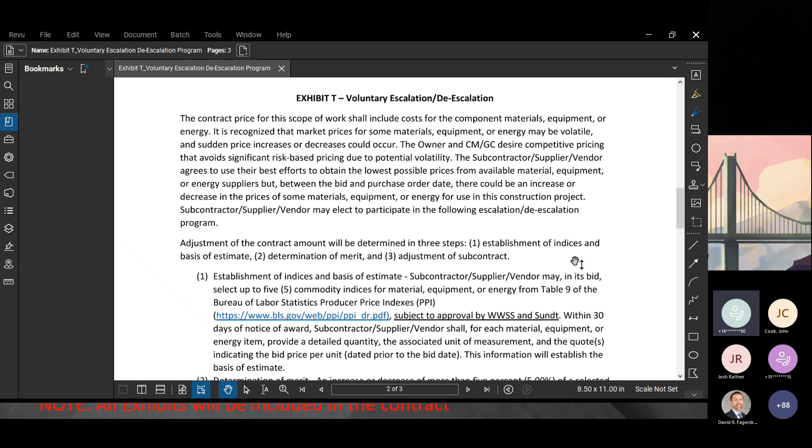Basically, we know that the market has been volatile. It's been up and down. It's very hard to predict pricing. And ultimately, we want our subcontractors and vendors to provide the best possible pricing for the job and not have to carry the burden of incorporating an unknown level of contingency into their bids. So to help alleviate that requirement, we have this voluntary escalation or de-escalation program.

It's going to be done in 3 steps. The first, if you choose to participate in this, is establishment of the indices and basis of estimate. So you can go to the Bureau of Labor Statistics website and pick up to 5 of the commodity indexes from Table 9, and those will be approved by either Sundt or the Willamette Water Supply. Then within 30 days of notice of award, the selected awardee needs to provide their basis of estimate - a quote showing the unit price, quantities, and each line item associated with the PPI that they selected as part of their bid process.

The next step is determination of merit. So when that producer price index increases or decreases by more than 5% from the baseline month, that triggers whether or not we're going to allow for there to be a change order relative to escalation. We gave a small example here.

This bidder selected non-current carrying wire devices. In April, they submitted their bid, and it had a producer price index of 156.1. By August, that increased to 178, which is a 14% increase, so yes, they would get merit. If they end up incurring some additional costs for these other non-current carrying wire devices, we would be allowed to provide them with a change order. On the other hand, ready mix only increased 2.1%, and they would not be allowed a change order for any material that they purchased relative to ready mix concrete.

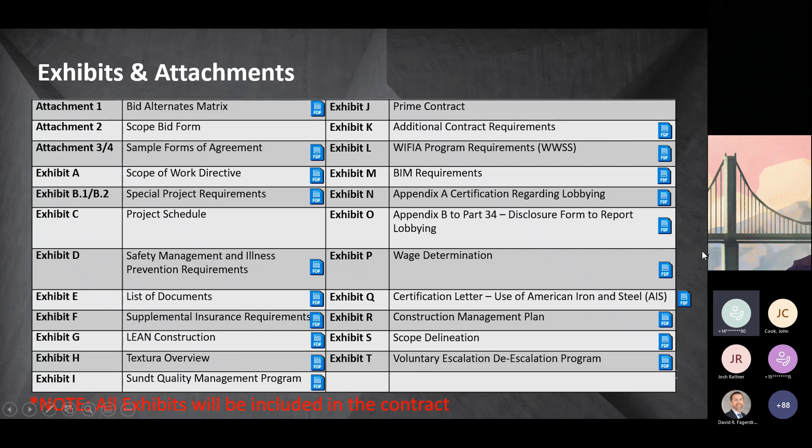I'll give you a quick example on the next slide of how the voluntary escalation and de-escalation program will work. I mentioned 3 basic steps: establishment of the indices and basis of estimate, 2 is determination of merit, and 3 is the adjustment of subcontract value.

The Bureau of Labor Statistics publishes a producer price index on a monthly basis. As you're evaluating your bids, you would go to the Bureau of Labor Statistics website that we provided, take a look at it, and jump down to Table 9. Table 9 lays out the commodities and the commodity codes, and that's what we need to be paying attention to. It gets very detailed.

So from farm products to fruits and melons, fresh fruits, citrus fruits, down to lemons and grapefruits on the front page. As we go a little bit further down, it becomes more construction-specific items, like metal containers and non-ferrous foundry shop products. There's quite a few pages of documentation here.

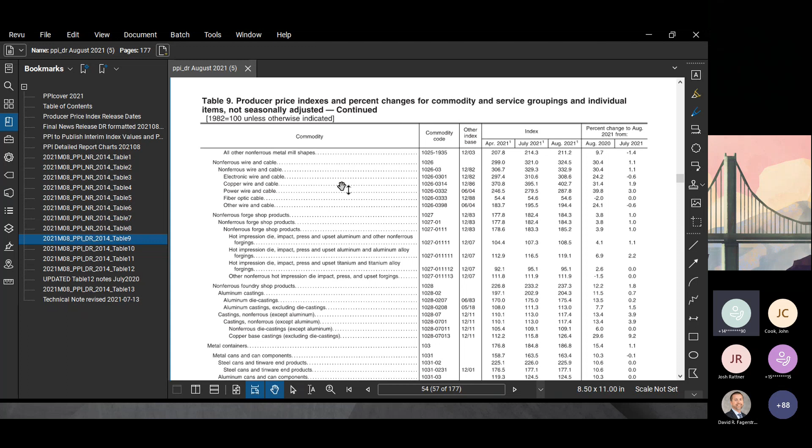The expectation is that if you choose to participate in this program, you'll select 5 of these commodities and commodity codes.

So if I'm a subcontractor and I've elected to participate, at the bottom of my Exhibit T, for my bid I only selected 2 indices: stainless steel pipe and concrete. Those commodity codes are 1017-0674 and 1333. The specific material I'm supplying related to it: with stainless steel pipe, I'm providing stainless steel pipe, and with ready-mix concrete, I'm providing concrete to the project.

So this is part of the bid process. This needs to be turned in with the bid form. This is basically step 1B.

Once you've been notified that you've been awarded, I've been notified that I've been awarded. Within 30 days after the CMGC says you're going to get this contract, I need to provide the basis of estimate, so I'm going to provide the quotes related to those producer price indexes that I selected.

So for that first one, the pipe: I need to buy 316 stainless steel pipe, 4-inch. The job has 100 lineal feet of it, and my bid price was $30.94 for the material, and here's my quote to back that up.

Same thing with concrete: 50 cubic yards of concrete at $225 a yard, and here's the quote that I received from a concrete supplier that reflects that $225 price. So that's the basis of estimate.

Now fast forward a few months, and I am ready to actually perform the work on site. So my first step is I'm going to go take a look at the newest and latest producer price index. My first producer price index for stainless steel pipe went from an index of 113.9 to 122.2.